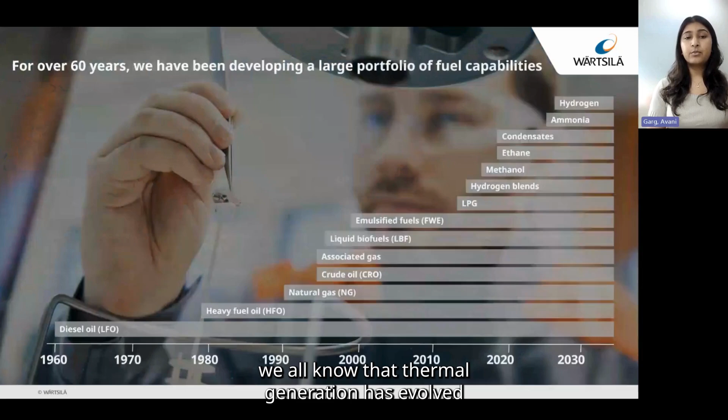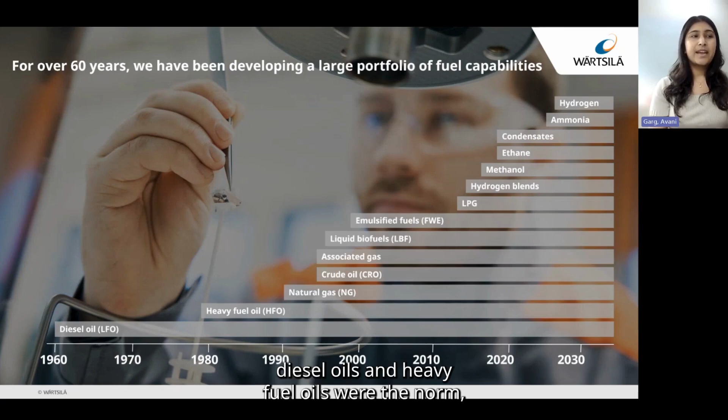All right, so jumping into the topic today, we all know that thermal generation has evolved significantly over time. As you can see, 40 to 50 years ago, diesel oils and heavy fuel oils were the norm, and then natural gas quickly became the front runner in fuels. And today, we still believe that there's room for all fuels to play a role. We're still seeing on remote islands and such where gas isn't available, people are still running on traditional liquid fuels. There are countries which are moving more towards LNG and gas.

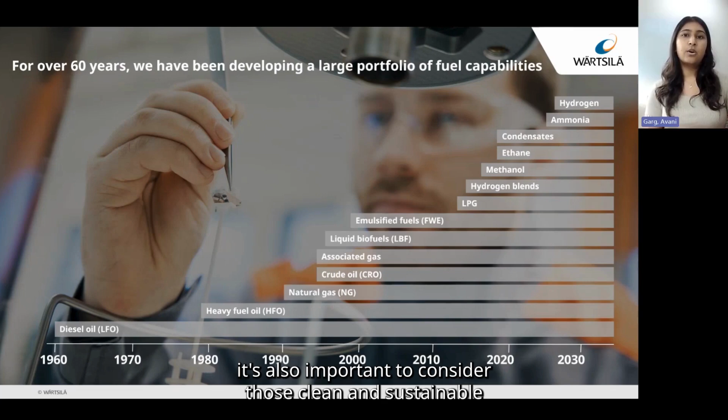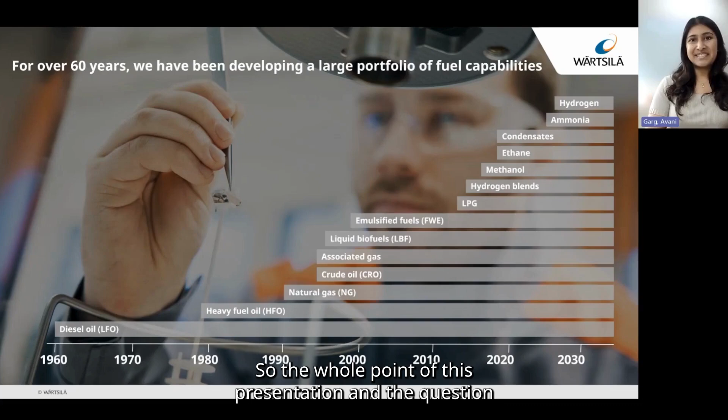But then as we look at decarbonization, it's also important to consider those clean and sustainable fuels like methanol, ammonia, and of course, hydrogen. So the whole point of this presentation and the question that we all want an answer to, or at least I definitely do, is hydrogen-based power generation just a buzz in APAC? We're continuously hearing about hydrogen and announcements being made and MOUs being signed, but really, what are the fundamentals behind hydrogen?

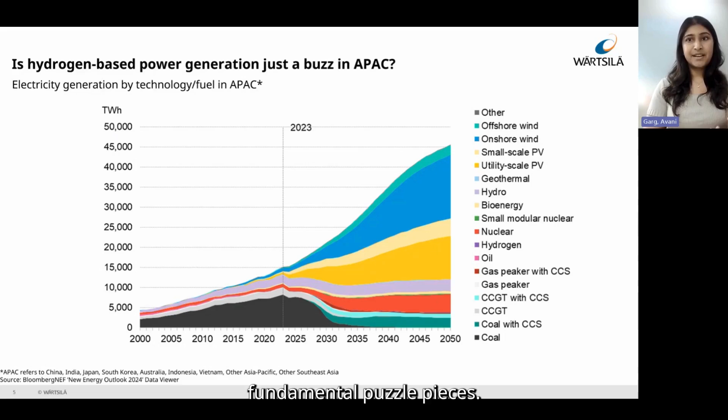So why is that the case? If we're talking so much about it, why are we not really seeing it in these forecasts? And what can we do to make a greater push for hydrogen in our power systems? So while there are many moving parts to make hydrogen-based power generation a reality today, let's try to break it down and simplify it into three fundamental puzzle pieces. So I like to call this the hydrogen trilemma.

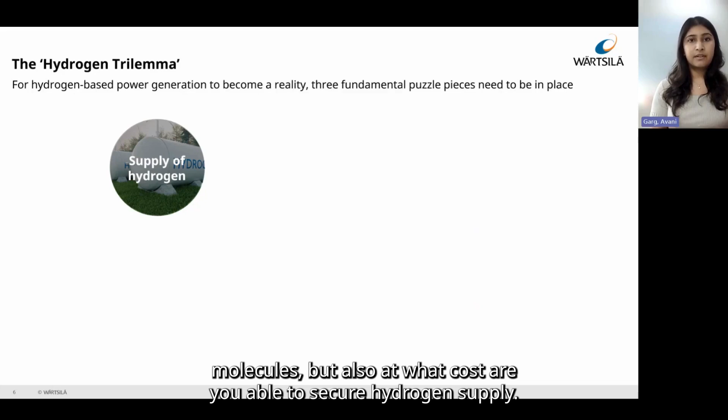So first, obviously, you need the supply of hydrogen. And here, I'm not only talking about the availability of the molecules, but also at what cost are you able to secure hydrogen supply. Secondly, you need to have the midstream infrastructure in place. So whether the transportation is being done through pipeline, trucks, or ships, and then storage is a whole other challenge, which we'll discuss a little bit later.

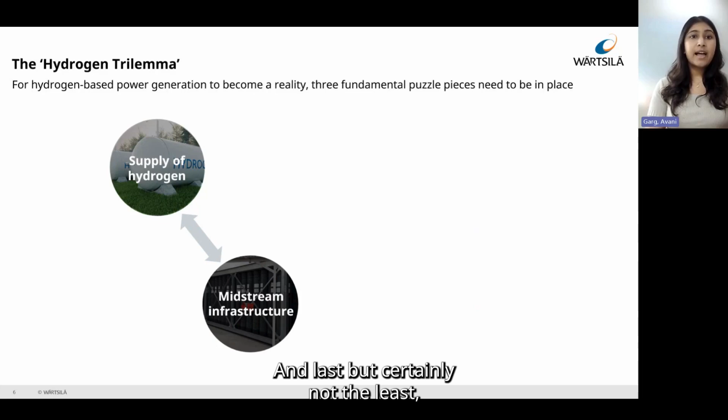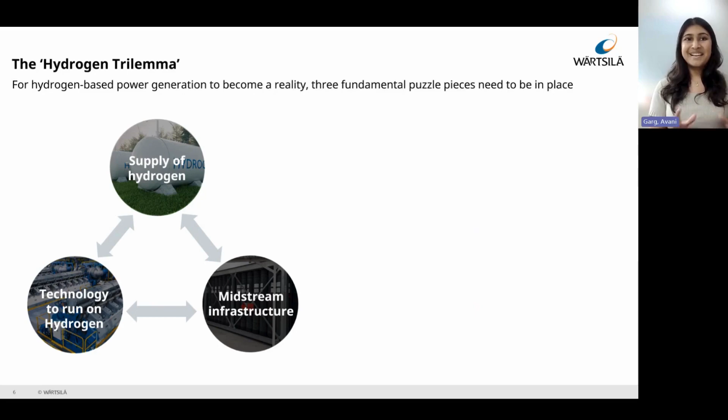And last, but certainly not the least, if you somehow manage to get the supply and the infrastructure in place, you, of course, need the power generation technology to be able to run on hydrogen. And if this wasn't complicated enough, all of this does still need to be underpinned by policies and grants.

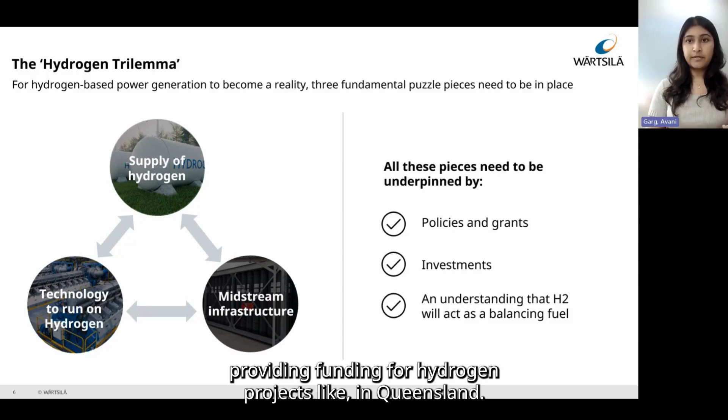Investments and the understanding that hydrogen will act as a balancing fuel and not as a baseload fuel. So a really good example not too far away from us in Southeast Asia in terms of policies is in Japan, where there is this targeted existing capacity mechanism for up to 30% volume of hydrogen. We also see state-owned utilities in Australia providing funding for hydrogen projects, like in Queensland. The utility there is actually funding a 400 megawatt hydrogen-ready peaking power station with a 35% hydrogen blend.

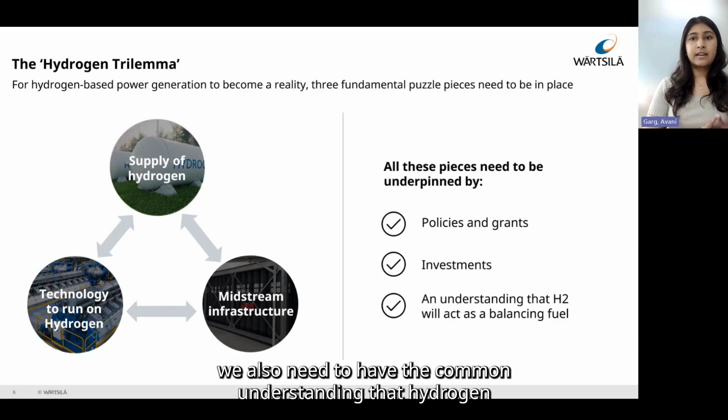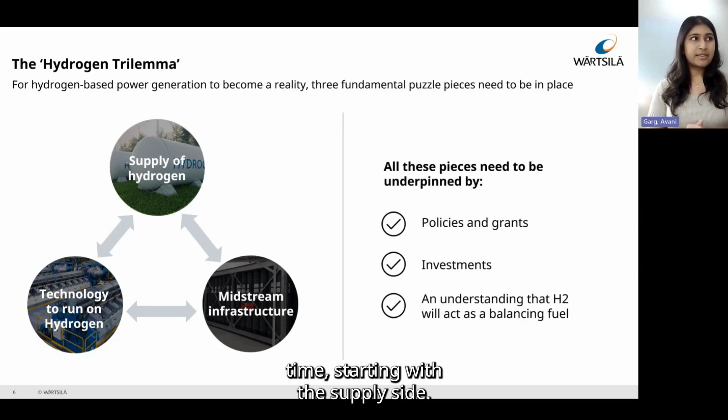And of course, on the third point, because of the cost and the logistics of hydrogen, as we'll see a little bit later, we also need to have the common understanding that hydrogen power plants will not run as baseload, simply because the economics do not make sense, and it's probably not the best use of the hydrogen molecules. So let's take a look at each of these 3 points in the hydrogen trilemma one at a time, starting with the supply side. So where will, or maybe where should, green hydrogen be used to begin with?

So the primary use of hydrogen molecules will be prioritized towards the industrial hard-to-abate sectors, such as steel, aviation, shipping, and chemicals. And in most cases, these industries won't actually use the hydrogen directly, but they'll use chemicals built from hydrogen. So as you can see from this graph, the use of hydrogen in the power sector is in blue, which is just that small portion towards the top, compared to some of these other sectors, especially steel, making up that big purple portion.

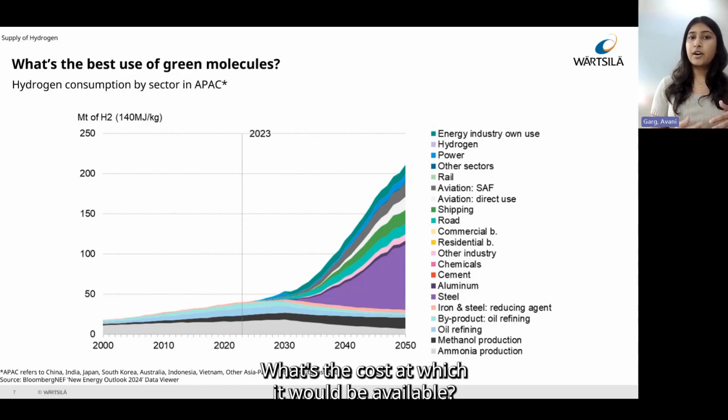So, okay, now let's say we do have hydrogen available for power generation. What's the cost at which it would be available? So based on S&P, in 2030, for early markets that are deploying green hydrogen in APAC, the delivered cost would be about $10 per kg. But there are a lot of developments going on for these costs to come down. So as you can see in 2040, we could see a 30% decrease with a delivered cost of $6.8 per kilogram. You can see that this delivered cost is split almost evenly between the cost of green hydrogen production, as well as the storage and transportation costs.

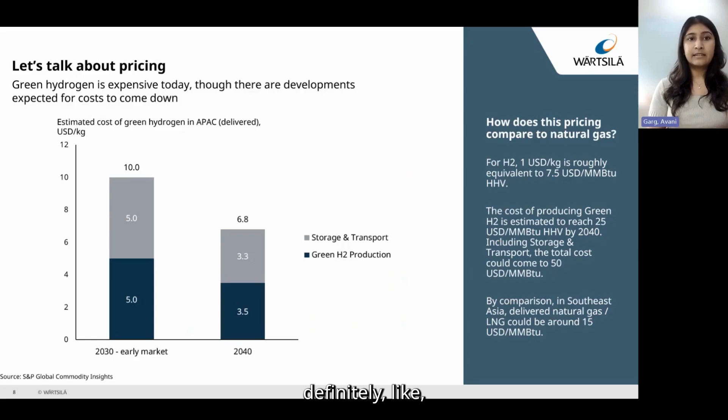So now if you're like me and you're used to seeing fuel pricing figures for gas and liquid fuels, then the dollar per kg figure might not mean much to you. So as a rule of thumb for hydrogen, $1 per kilogram roughly equates to $7.50 per MMBTU. So what this means is that in 2040, the pricing that you're seeing is roughly $50 per MMBTU. Now, today, depending on where you are in Southeast Asia, the delivered cost of natural gas or LNG could be around $15 per MMBTU, which is less than 1/3 of the cost of hydrogen. So I think this just further backs the point that we discussed earlier, that there's definitely a need for government support and grants for these hydrogen projects to be economically viable, even with all these ongoing cost developments.

So that was the first point of our hydrogen trilemma. Now let's move on to the midstream infrastructure for hydrogen. Now, hydrogen is a bit tricky because 1, it's not very dense. 2, it's a very small molecule, so it leaks quite easily. And 3, hydrogen is very flammable. So given these constraints, it is still possible to move hydrogen by pipeline, by truck, rail, or by ship.

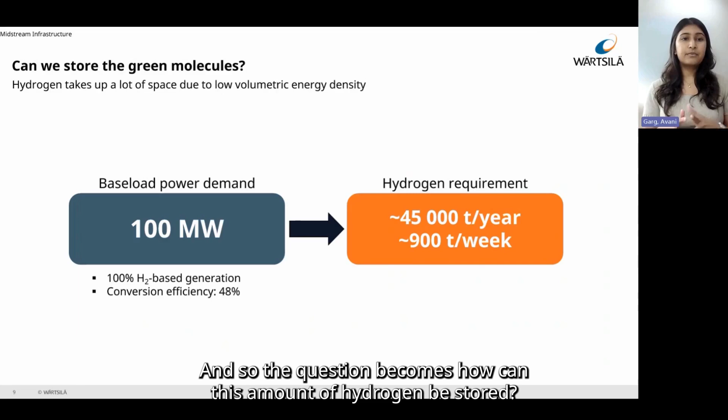So hydrogen as a gas at room temperature takes quite a lot of space. So it's roughly 3 times more space than natural gas and 300 times more space than diesel. So if you're talking about, let's say, 100 megawatt baseload power demand, you'll roughly need 900 tons of hydrogen per week. So that's a fair bit of hydrogen. And so the question becomes, how can this amount of hydrogen be stored? So if you talk about larger tank sizes, you'll need about 300 units.

And if you talk about 45-foot shipping containers, you're talking about over 800 units. So cost is one thing when it comes to the storage, but also this creates a massive logistical and handling challenge. So for this reason, like mentioned before, hydrogen should not be used as a baseload fuel, but rather should be acting as a balancing fuel in a net zero power system.

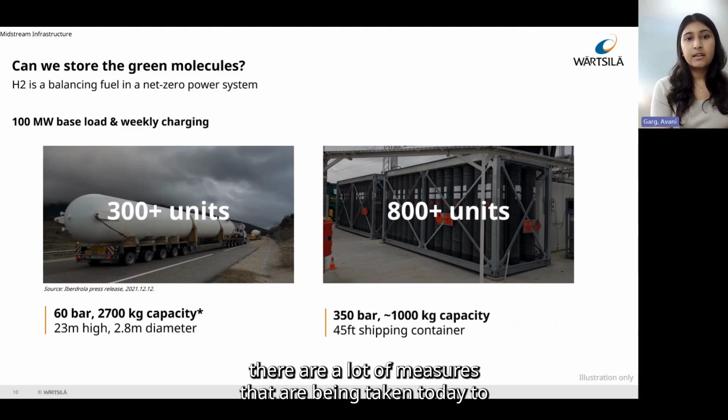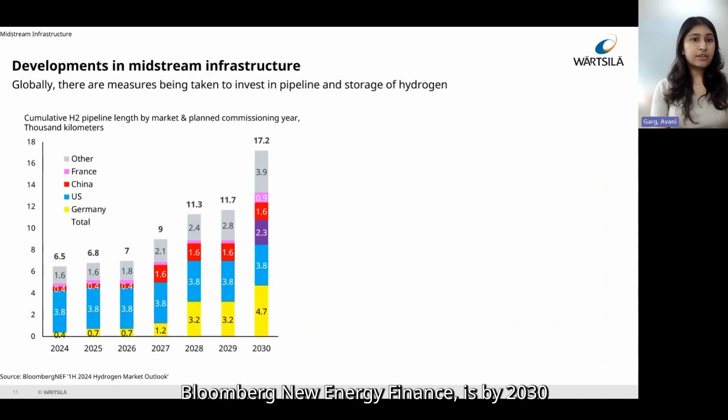So the picture is not all that bad. While it might seem quite challenging, there are a lot of measures that are being taken today to invest in pipelines and storage of hydrogen. So there are only a few hydrogen pipelines that have reached FID. So what you can see here, again, from Bloomberg New Energy Finance, is by 2030, there could be about 17,200 kilometers of hydrogen pipelines based on announced projects today.

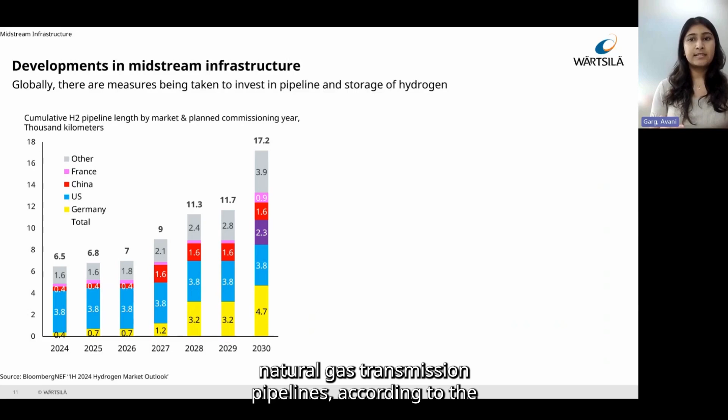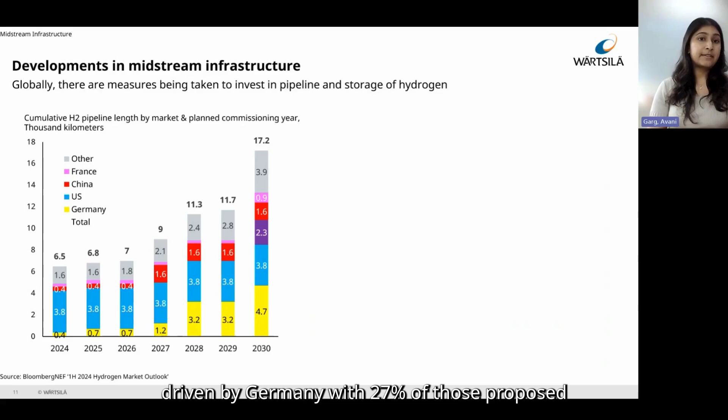Now, for context, in 2019, there were 3 million kilometers of natural gas transmission pipelines, according to the IEA. So there is a pretty big gap that needs to be filled. But as you can see, the pipeline investments here are being driven by Germany, with 27% of those proposed projects coming from there, with quite a significant portion also then coming from the US.

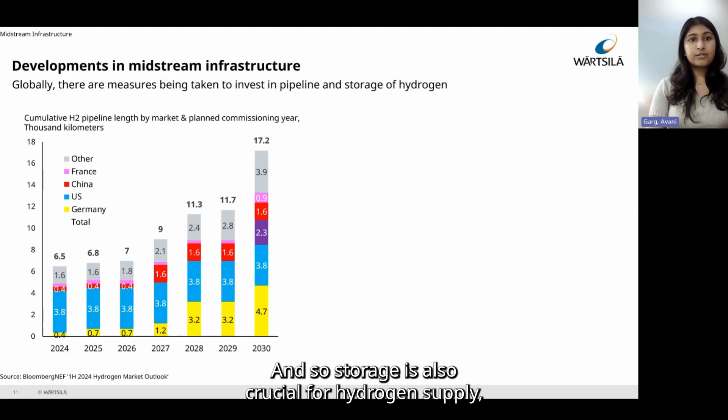Although here you can see that about 60% of the global storage capacity is actually being proposed to be built in the US. So the key takeaway here is there are a lot of measures being taken to build hydrogen infrastructure, but it's just critical to remember that hydrogen will act as a balancing fuel, not baseload, and there is still a very long way for the APAC region to go if they want to make hydrogen a reality.

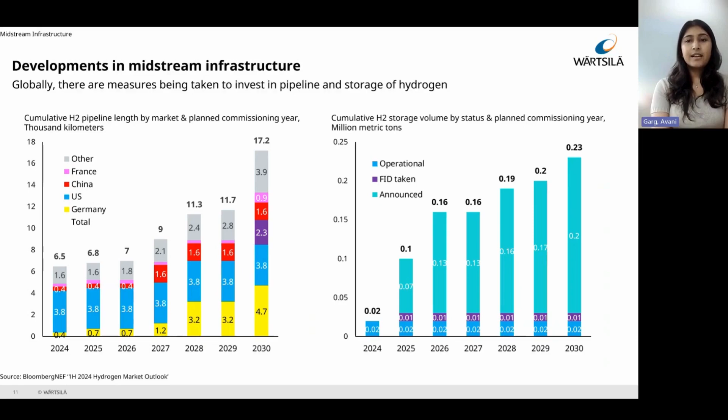So, all right, now jumping to our last piece in the hydrogen trilemma, which is having the technology to be able to run on hydrogen. And this is going to be crucial to make hydrogen-based power generation a reality. The first step, while the industry is ramping up on the supply and infrastructure of the molecule, is to actually be able to blend hydrogen into existing and available fuels. And today, Wärtsilä engines are able to run on a 25% hydrogen blend without any modifications on the engine, and this correlates to approximately a 10% CO2 emission reduction.

And a really good example of this is a Wärtsilä engine power plant in Michigan in the US, where we conducted the world's first utility scale and grid connected hydrogen blending test in a reciprocating engine power plant. It was a 55 megawatt engine based power plant. And these blending tests are a great way to test out the technology and lower emissions progressively and steadily. But we don't stop there.

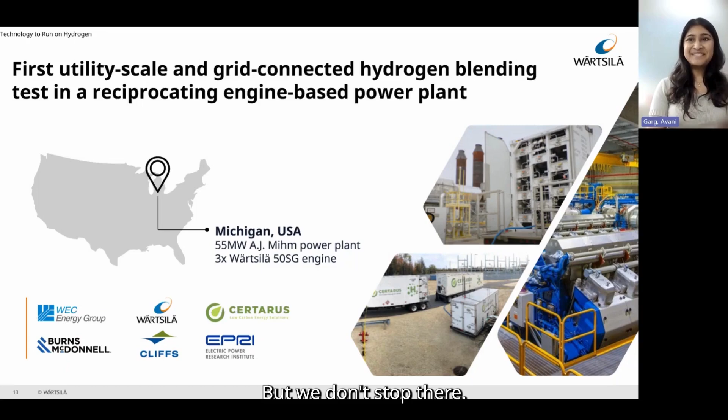The final step to a fully decarbonized system will be a full hydrogen-ready engine power plant. And I'm very happy to say that Wärtsilä has launched the world's first large-scale hydrogen engine power plant, one that has also been certified by TÜV. So there's a lot of progress that's being made on that last point of the hydrogen trilemma.

So just to conclude, we are seeing steps being taken in the right direction when it comes to the supply and cost of hydrogen, the infrastructure in terms of storage and transportation, but we will need strong support from government policies, from grants and investments. As you can see, the technology is ready for hydrogen to be used as a balancing fuel. And hopefully by this time next year, we have even more positive developments in that last mile decarbonization that's needed towards a net zero power system in Southeast Asia.